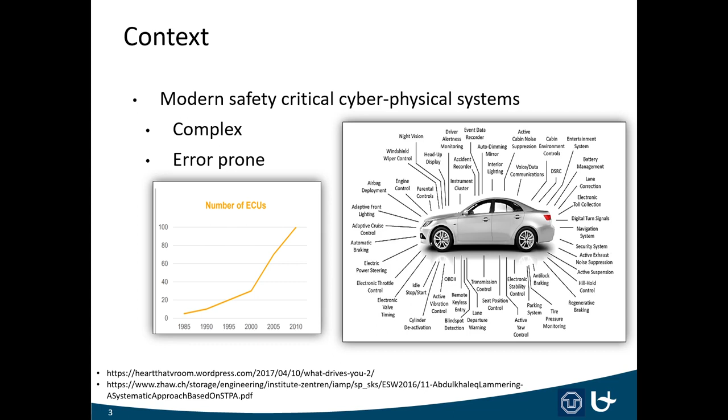In context, we know that modern safety critical cyber physical systems are very complex. For example, here is a modern car that consists of many ECUs, and the number of the ECUs is exponentially growing, and this complexity makes the system error prone and also makes the testing process very costly for the vendors. Vendors are interested in the dependability analysis in order to check the system reliability, determining the failure modes, check the safety properties, robustness, etc.

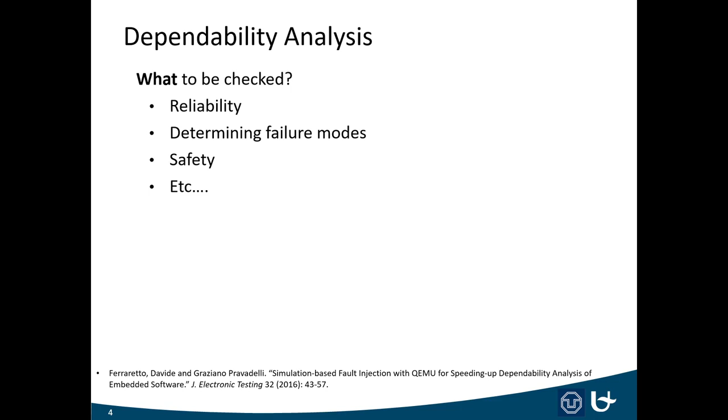One way to do dependability analysis is fault injection, in which the testers stress the system, which can be a virtual system or real system. They stress the system in an unusual way in order to observe the system behavior. So what they basically do is they have an original system, or here is the original model. They run the simulation or experiment, they store the result, and then they have a bunch of faulty simulations or faulty models that have a fault within them, and they run those simulations as well, and at the end they compare the results from the faulty runs with the golden runs to see the system behavior.

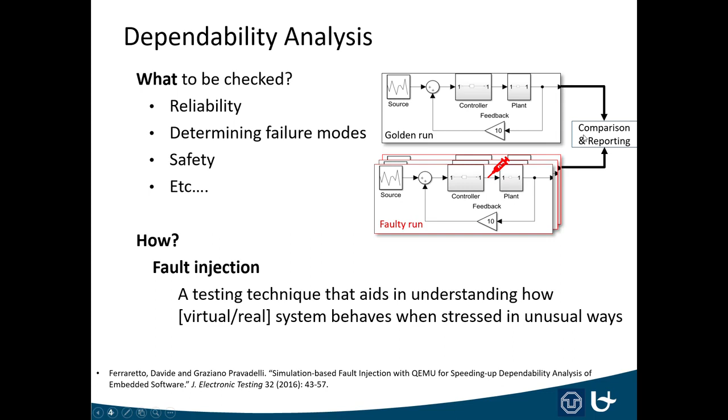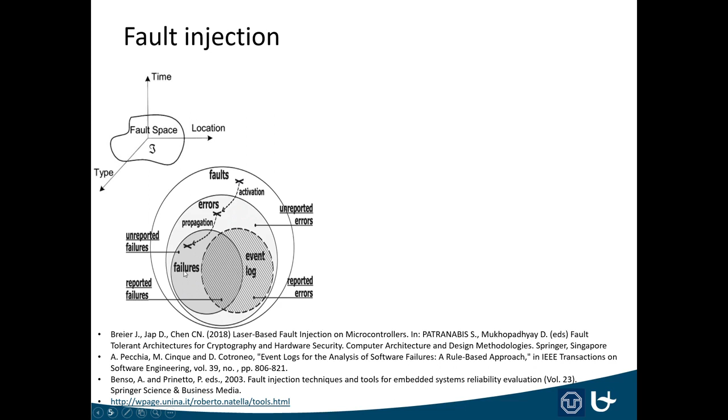In fault injection, a fault has three main dimensions. One is the activation time of the fault, another is the location of the fault in the system, and the third one is the type of the fault. We are interested in finding a critical fault that can fail the system. This fault space is very huge, and most of the faults that we are activating are masked somewhere in between and don't lead to a failure at the end.

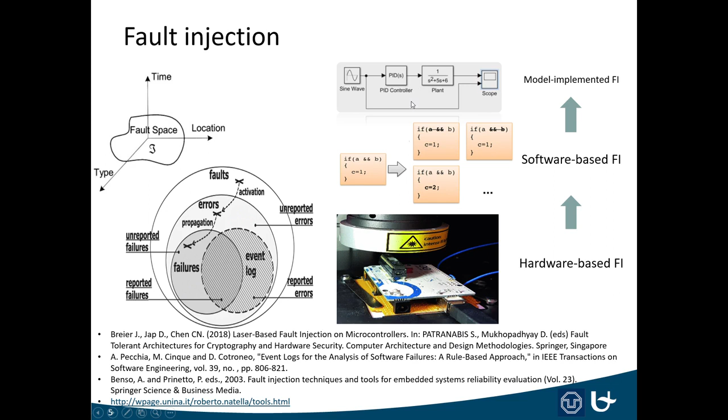Fault injection traditionally has been done on a hardware basis, where the testers bombard the hardware with high energy radiation. Then we had software-based fault injection, in which developers mutate some operands or operators or some variables in the source code. And also we have model implemented fault injection, where we inject the fault in the model and observe the behavior of the virtual model. In this paper, we mainly focused on this model implemented fault injection.

The research problem in fault injection is that exploring the fault space is very costly because it's very huge, and also the critical faults within the system are very costly to find. For example, here we have a fault space. It's actually not a real fault space, just to clarify. We have a 3D fault space, with the amplitude of the fault, injection time, and location of the fault. These red regions indicate critical regions that can affect the system property. In this research, we are working on a searching method to find critical faults within these red regions.

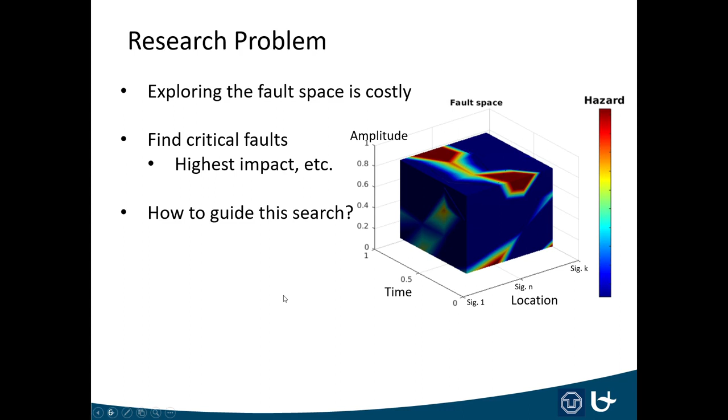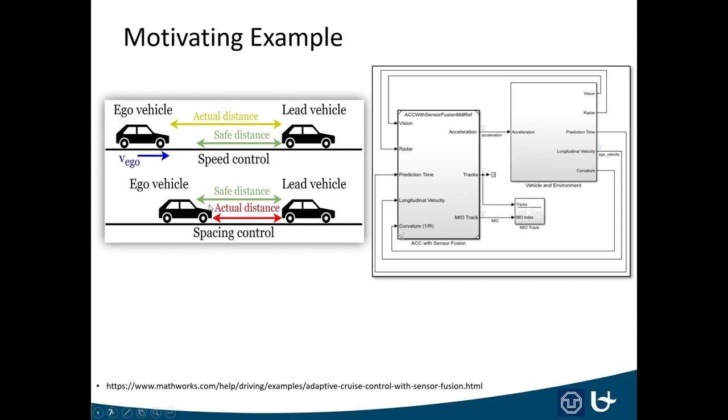As a motivating example, we use adaptive cruise control in Simulink. Adaptive cruise control consists of two cars, an ego car and a lead car. The ego car adapts its velocity in order to keep the safe distance. Adaptive cruise control here has two modes, the speed mode and the spacing mode. In the speed mode, it increases the speed in order to reach the predefined speed, and in the spacing mode, it tries to decrease the speed and acceleration in order to make the actual distance larger. The safety requirement here is that the actual distance must be greater than the safe distance.

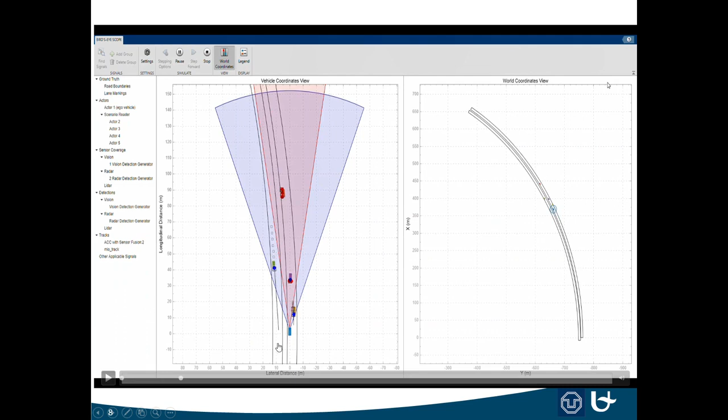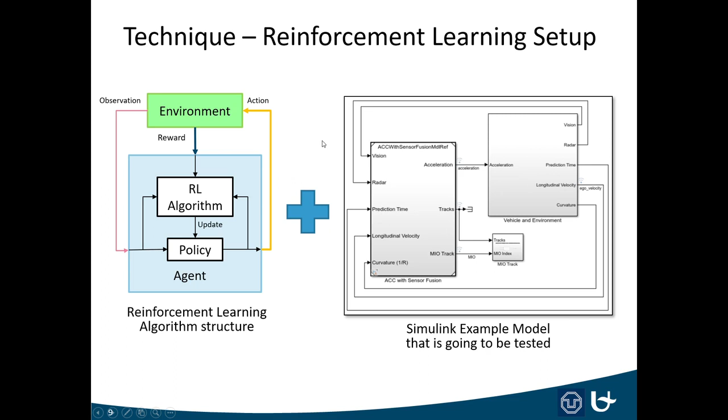In the proposed method, we use reinforcement learning. Reinforcement learning has this structure where we have the environment and the agent. The environment and the agent interact by action signals and observation signals. RL algorithm here tries to take the best action in order to collect the higher reward. We combine this structure with our example, with the model of the vehicle and the model of the controller. We put them all in the environment section, and we also add the fault injector here in between.

The fault injector injects the fault in the adaptive cruise control, and the fault parameter is controlled by this reinforcement learning algorithm, by this agent, which gets some reward functions from the simulation, from the observation. It tries to predict the critical fault, puts it in the fault injector, injects it, and then runs the simulation, and eventually it tries to converge to the critical fault.

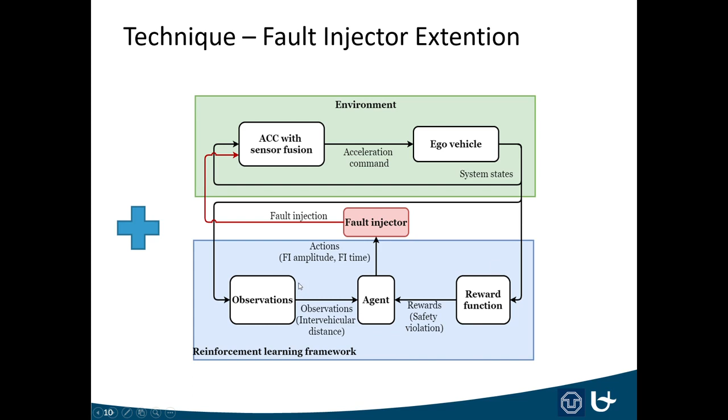And at the end, we have this implementation, which has the controller and the vehicle, and here is the agent and the fault injection part. The agent has three main parts: reward and fault injection part. In the reward, we implemented this reward function, which is represented here in the model level. The reward function is basically implemented based on the relative distance, velocity of the car, and the simulation time. And this reward function must be defined in a way to convey the agent toward the critical fault faster.

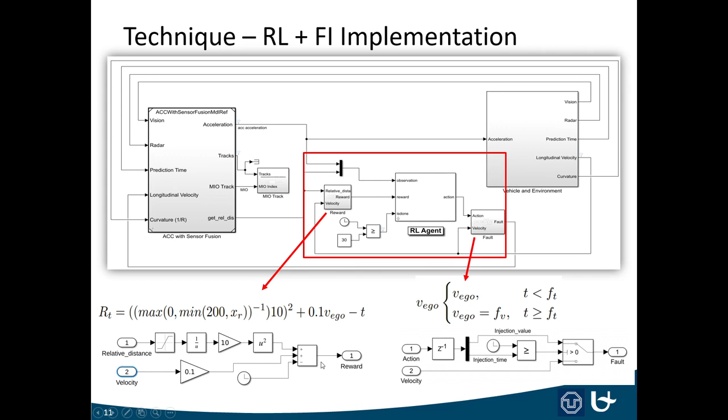And for the fault injector, we have the stuck-at value fault: before the injection time, before the activation time, the velocity of the car is the real velocity, but after the injection, the velocity of the car will be equal to a fixed value, and here is the model representing this equation. By running the simulation, the RL pushes the system into failure by injecting faults continuously, measuring the reward function, and trying to inject another fault which has more impact than the previous one.

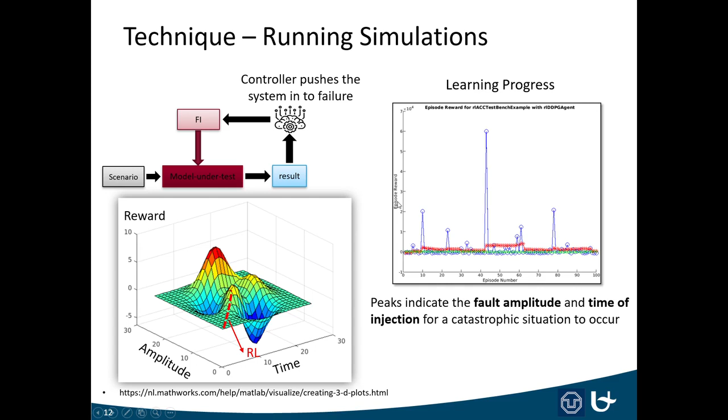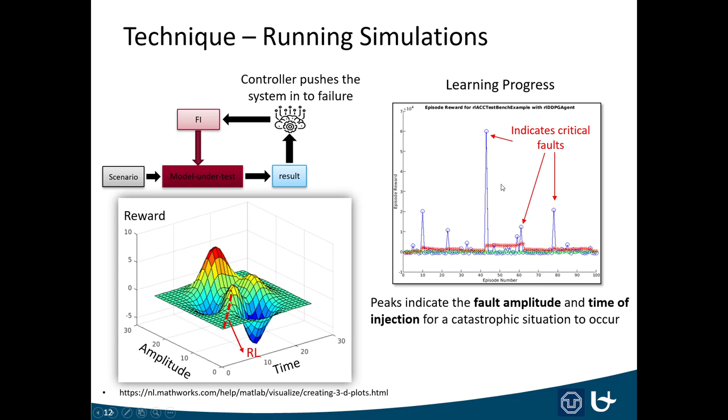And by the learning process, we reach these diagrams, and the peaks here indicate critical faults, and we can find the fault amplitude and the injection time in these peaks. And if we use these parameters in these peaks, we can have a faulty simulation that creates a crash or violates the safety.

So here is the faulty simulation. The ego car is increasing its speed. Here is the lead car. It detects the lead car, but the fault is injected and the ego car cannot decrease its speed. So the safe distance is violated, and yeah, we have a small crash here.

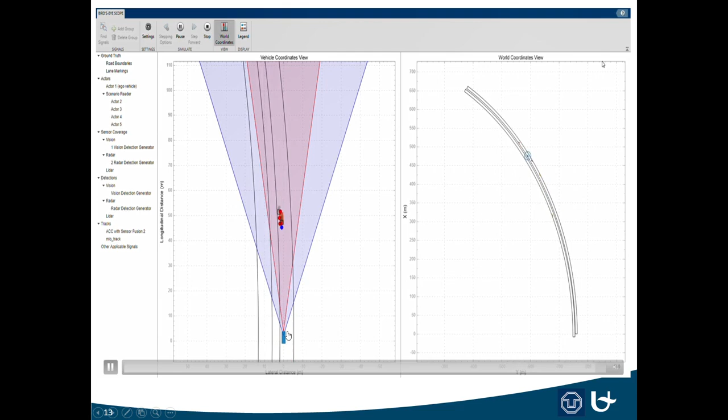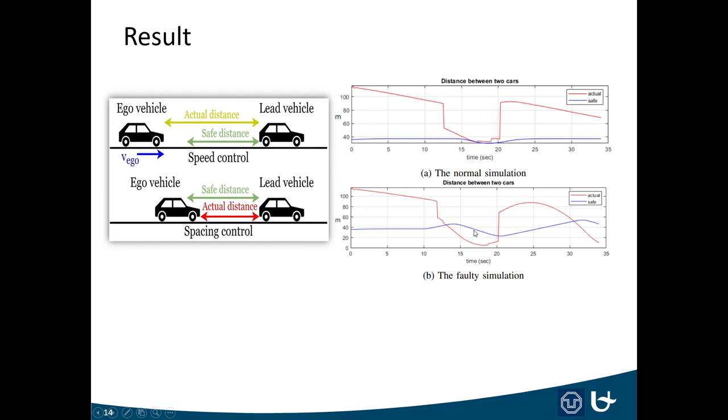As a result, we have a trace from the normal simulation and the faulty simulation. In the normal simulation, the relative distance is always bigger than the safe distance, but here in this region we can see that the relative distance is smaller than the safe distance, and it violates the safety specification.

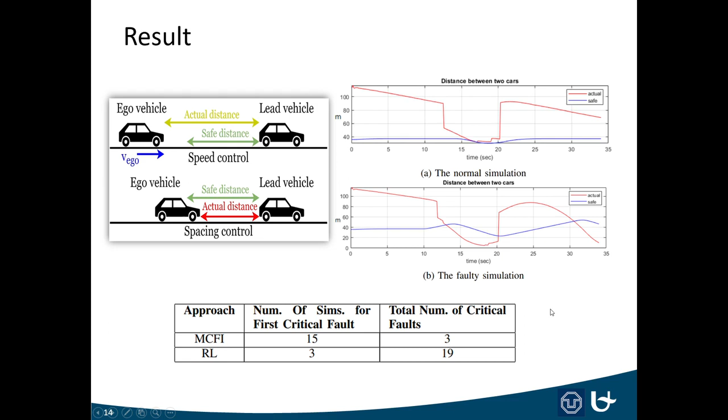Another outcome of this paper is lessons learned, and we learned how to shape the fault space searching problem into a setup that the RL can explore. We learned that we need domain knowledge about the model and the testing scenario, about how many modes the model under test has, the signal ranges, continuity or discontinuity, and the other actors, driving scenarios and the environment in the testing scenario. Based on this knowledge, we can choose a proper setup for the RL for both the policy and the reward function.

The reward function mainly is a reverse of the safety requirement, but for the structure of the policy, we need more information about the scenario under test. In conclusion, we use RL to efficiently explore the fault space. Also, we have an automatic way to find catastrophic situations, and we have lessons learned on how to shape our fault space searching problem into an RL solution.

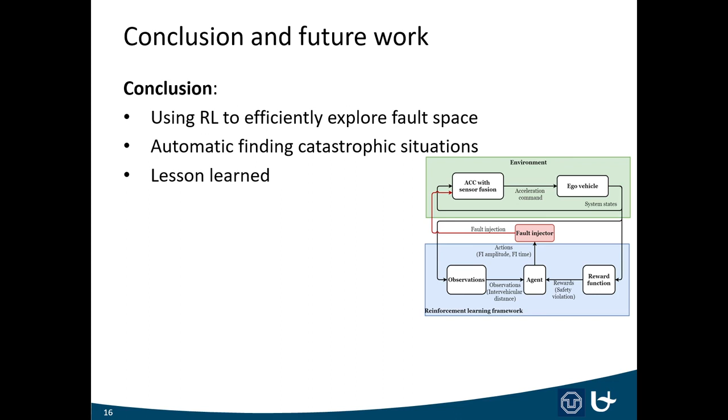And in the future, we will use a stochastic policy that makes the method more efficient and more performant. Also, we are going to include domain knowledge in a systematic way, defining some steps that, if the tester follows those steps, will reach the solution much faster.